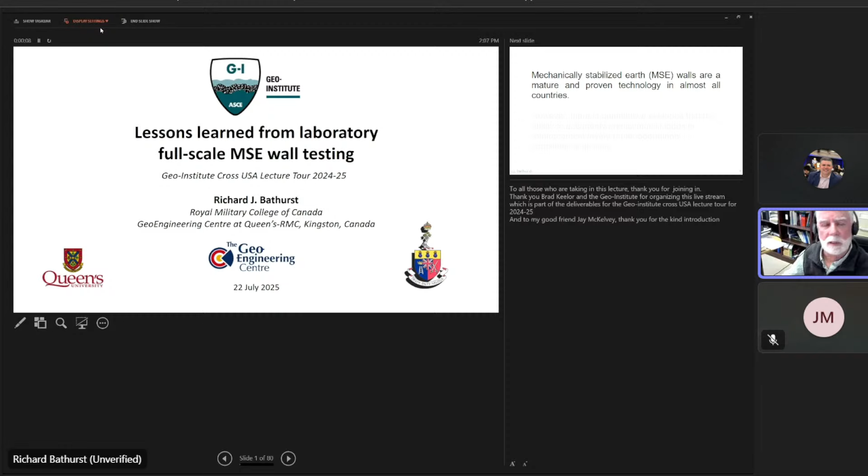I'm sharing my screen here, hopefully. We've got the whole screen, but here we go. It looks like something's coming. Just switching it over. So there we go. So if things are okay, then you should be seeing my first slide.

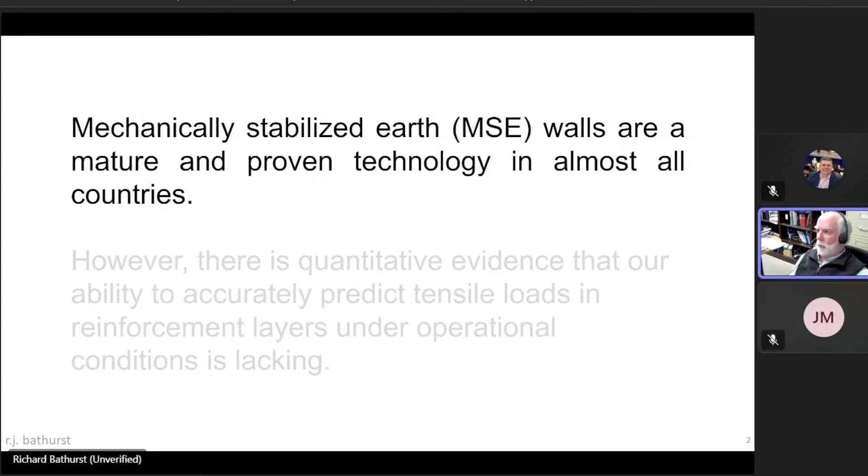For those who are new to the planet, here are some examples of MSE walls. This is a very famous wrap face wall that was constructed in the late 1980s. It was the highest wrap face wall of its type at that time. You can see in the cross section that this wall, like other MSE walls, is essentially a gravity structure in which horizontal layers of geosynthetic reinforcement are added to stiffen and strengthen the interior of this gravity mass. So this is a flexible wall face.

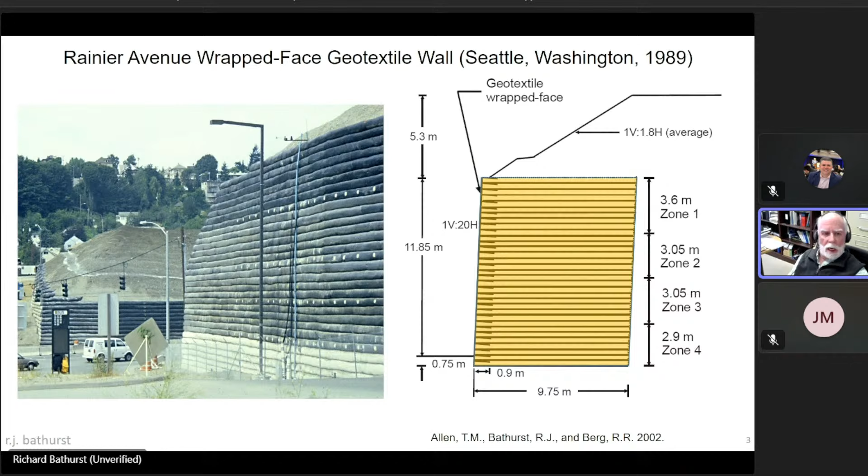But also hard-faced walls are constructed. This wall appears to the layperson as a tiered conventional concrete gravity wall, perhaps, or T-wall, but the fill behind the facing panels is reinforced with horizontal layers of a uniaxial geogrid in this example, which is affixed to the concrete panels.

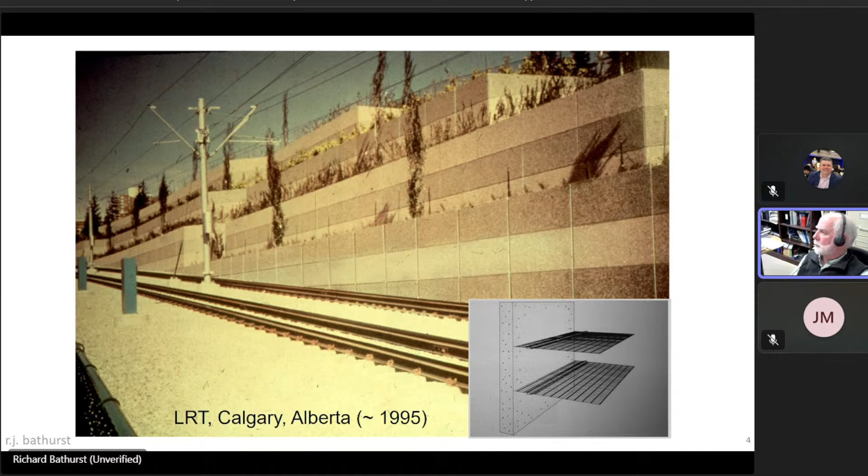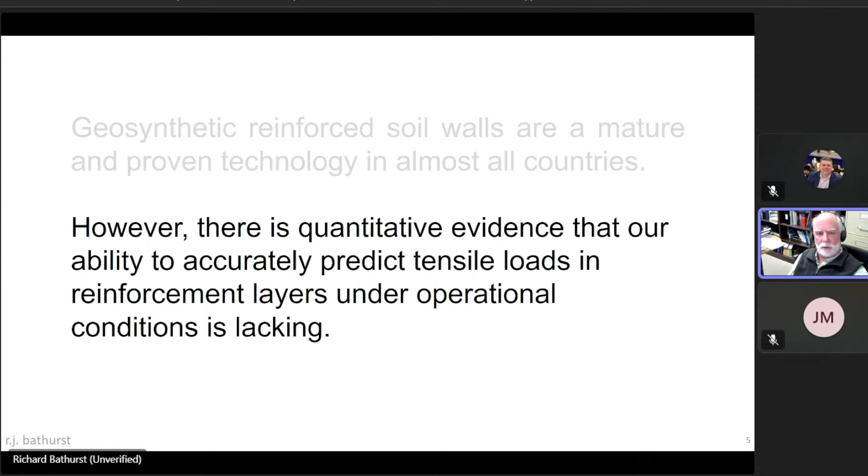So even though these structures are now ubiquitous on the earthworks landscape, at the time of the work I'm going to talk about, there was evidence that we couldn't accurately predict what the tensile loads in the reinforcement layers were under operational conditions. And of course, this was an impediment to the development of accurate and efficient design methods for the internal stability design of these systems. So how do we know this?

Well, myself and my co-conspirators collected measured loads from instrumented field walls, both steel reinforced type and geosynthetic reinforced type, although I'm going to speak mostly about geosynthetic walls in this presentation.

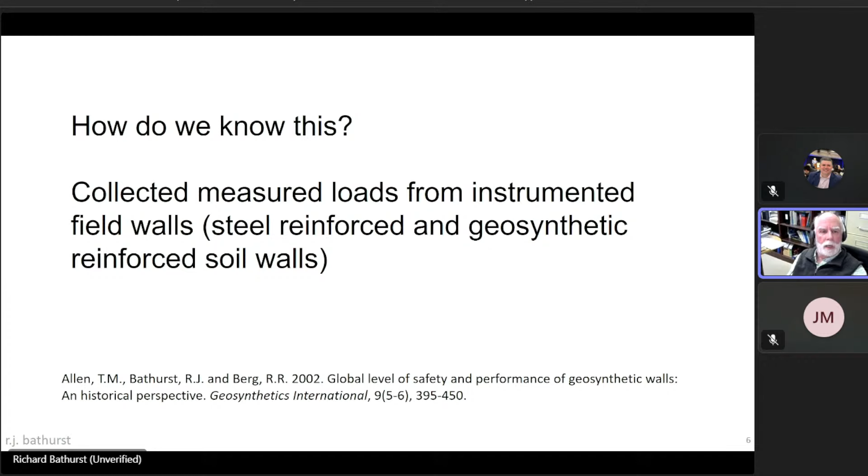Here is an example of a full-scale field wall. It was actually a test wall constructed near Chicago in the late... it was around 1990. Here you can see a modular block wall, and the right-hand side shows it during construction where a reinforcement layer is in place. You can see some extensometers, and you can see some slope inclinometer casings as well.

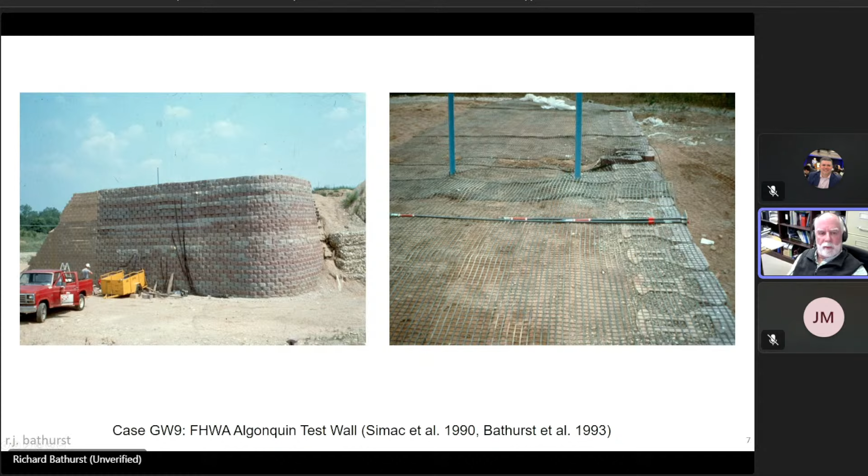So there were some quality measurements from full-scale walls available. Again, that very famous wrap face wall I spoke about earlier was also instrumented, and during construction and up until the end of construction and surcharging, the strains were recorded in selected reinforcement layers. From these strains, tensile loads in the reinforcement could be deduced.

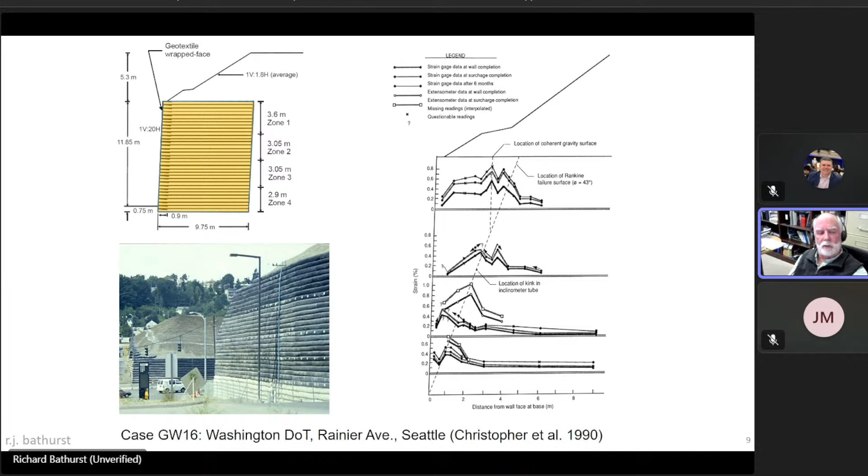From these full-scale walls, the accuracy of load reinforcement models could be tested. This was done by, for each instrumented layer in these walls, going to the existing design methods at that time and predicting what the maximum load in that reinforcement should be according to theory or the design methods. This is the simplified AASHTO method, if you like.

In fact, what we found was that on average, the measured tensile loads were about a third of those predicted using the current AASHTO simplified method. In addition, not only were the mean predictions of load hugely conservative, but the distribution of loads, as I will show later, was also poorly predicted by this simplified method.

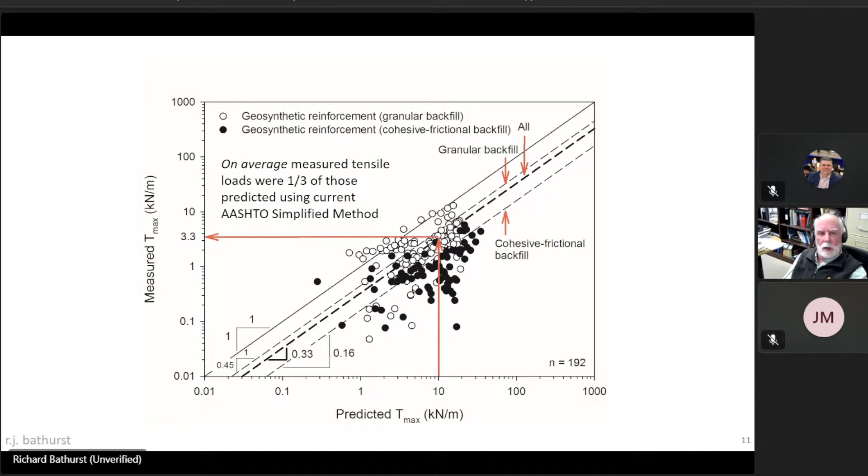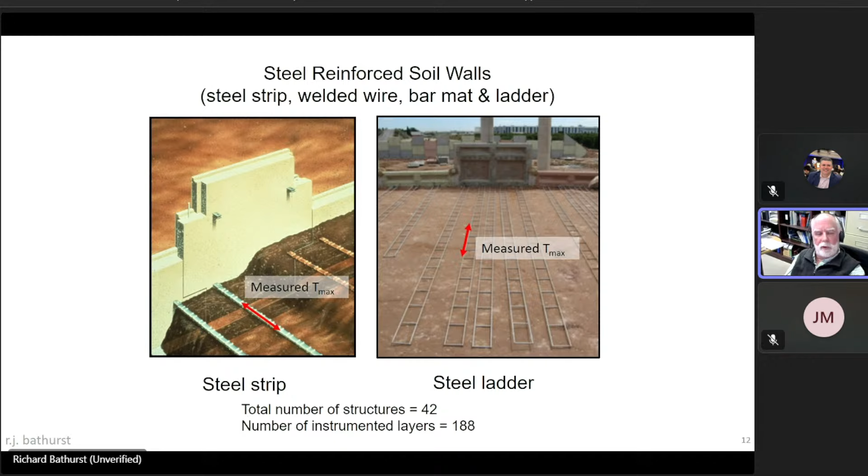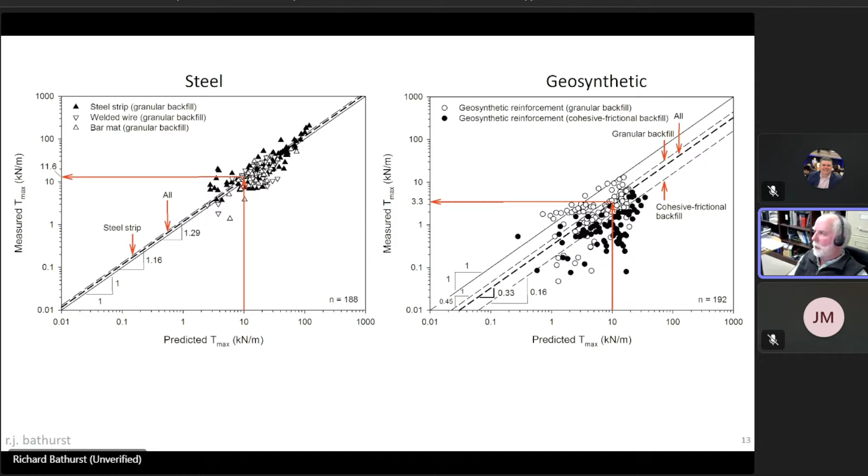So to better understand how these systems work, my colleagues and I decided we needed to carry out carefully controlled laboratory full-scale wall testing to complement the database of instrumented and monitored field tests. It's very difficult to get a field test instrumented and monitored for obvious reasons, and there's also the issue of control of the construction and instrumentation when you're trying to use a prototype field wall to make these measurements.

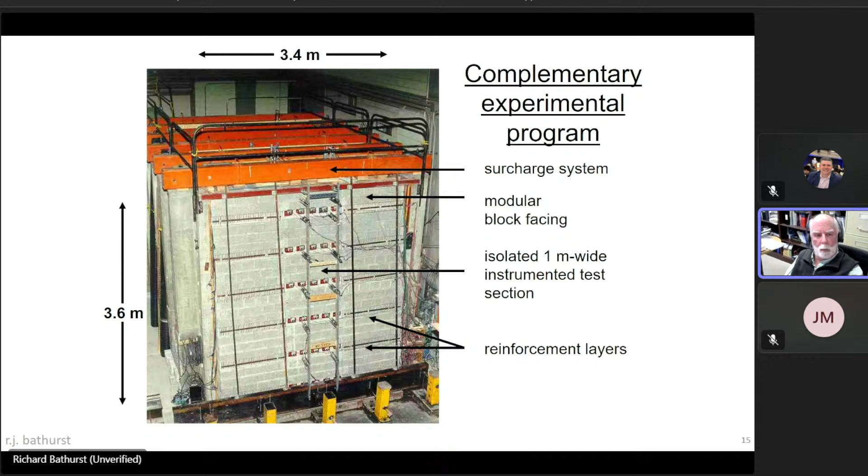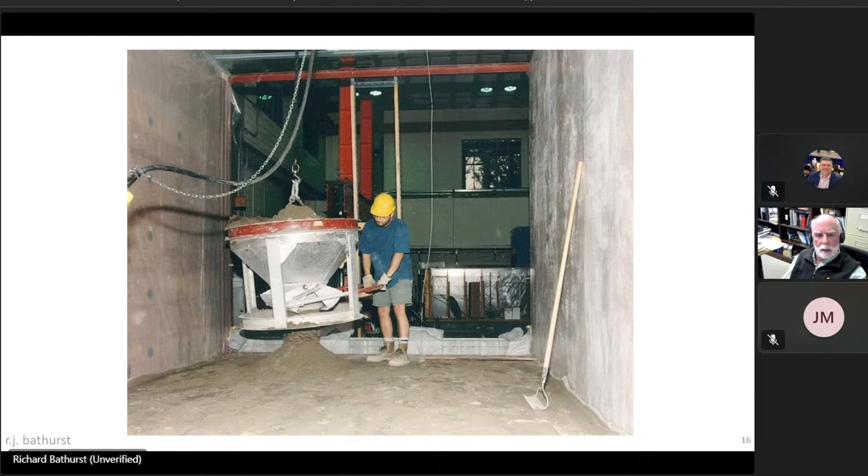In fact, there were over 300 pieces of instrumentation in a typical wall, and some of my friends used to tease me and tell me that I was testing an instrumentation reinforced soil wall.

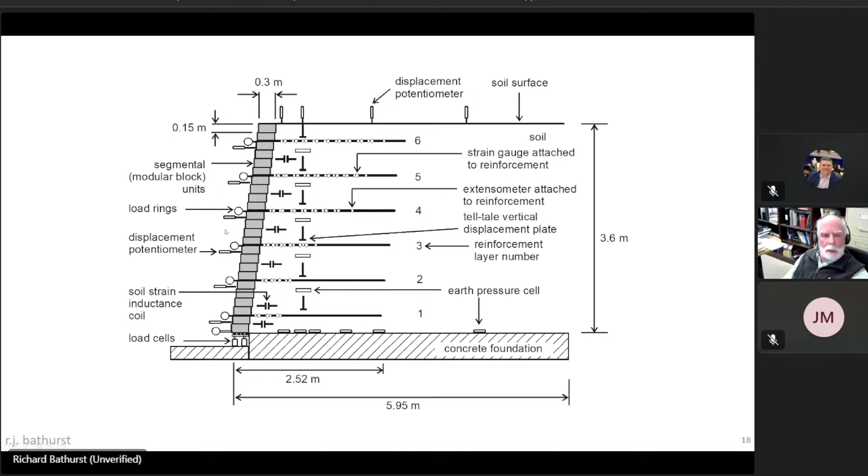So the idea was that we could then isolate the contribution of the effect of, for example, the facing type, the number of layers, or the polymer type. Here we see a cross section of the control wall, and the shaded area are the modular blocks. The facing was inclined at a batter of 8 degrees. Again, after the wall was constructed, it was surcharged in stages.

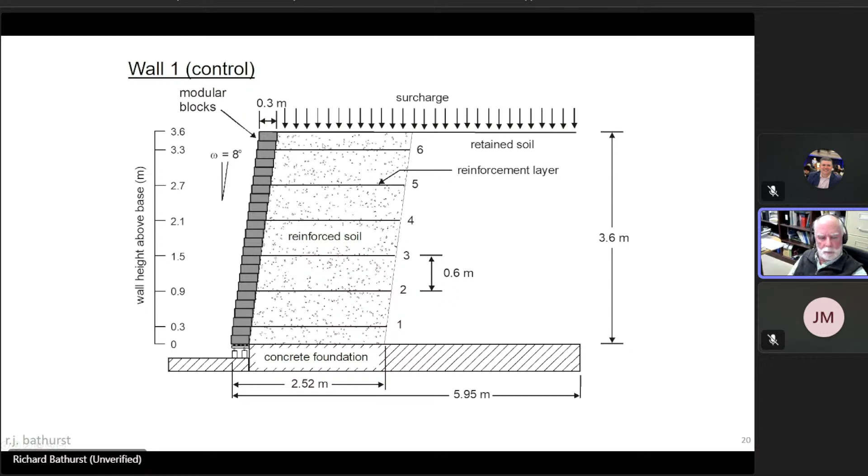Here is an example of one of the other walls. Again, it's a modular block facing, but now the facing batter has been increased from 8 degrees to 25 degrees. The idea is that the difference between wall 1 and wall 8 could be largely ascribed to the effect of the facing batter.

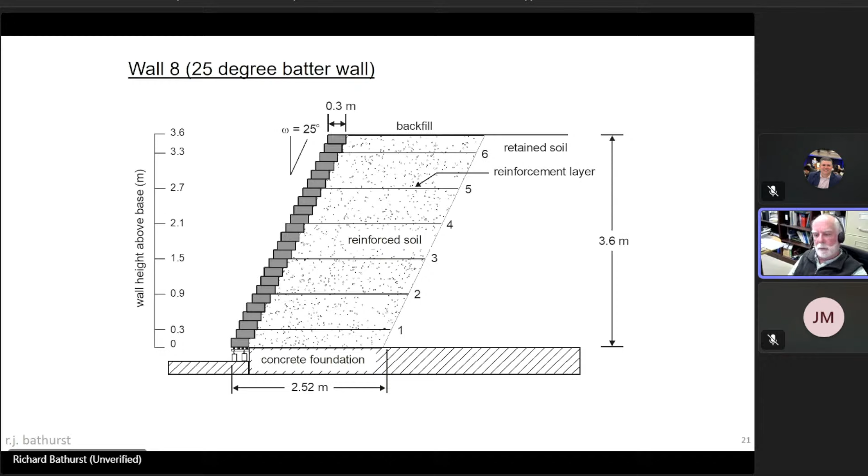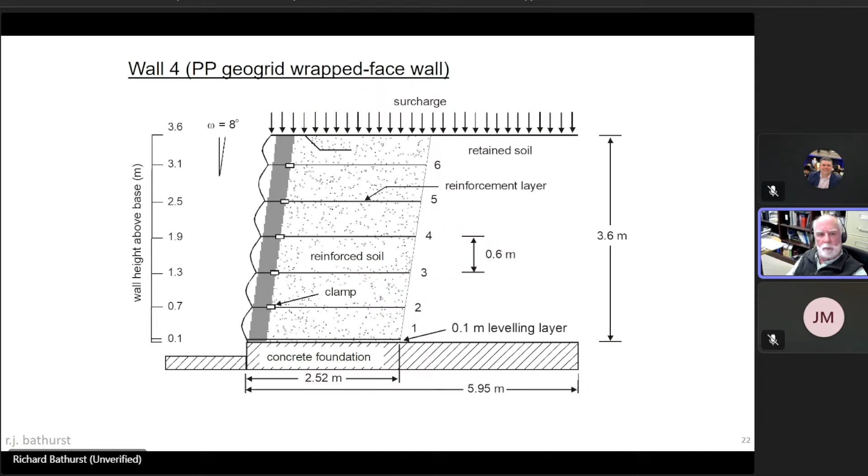I mentioned that we use different reinforcement types, including a polypropylene geogrid, a polyester biaxial grid, and we also used a welded wire mesh.

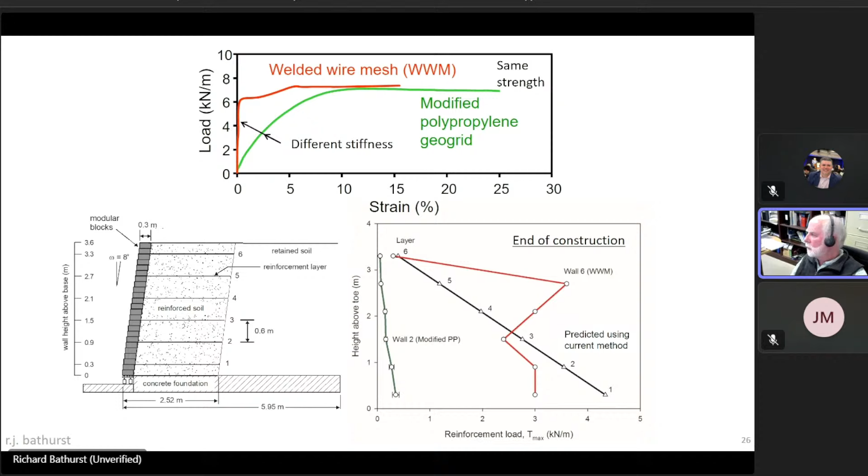So it's clear from the examples I've shown here, just from our lab testing, that it's reinforcement stiffness and not the strength of the reinforcement that is important. Both of those walls had the same strength, but they certainly didn't have the same stiffness.

Another observation we were able to make is that the soil and the reinforcement seldom simultaneously failed if you surcharge these walls heavily. This is in contrast to concepts of limit equilibrium, where reinforced systems are assumed to generate their limiting strength under the same conditions. This was not observed in our tests, and I can show that in the next slides.

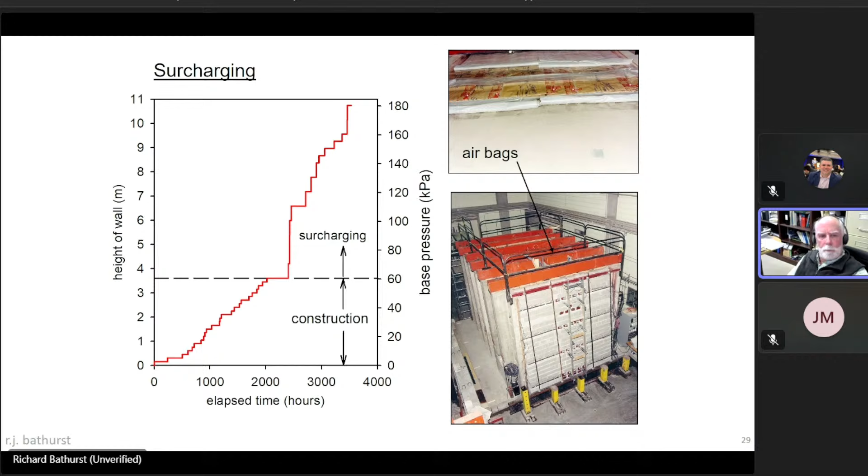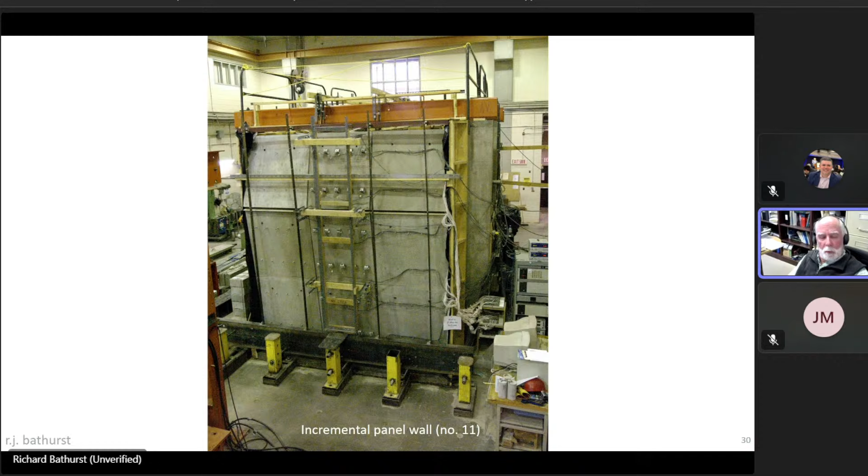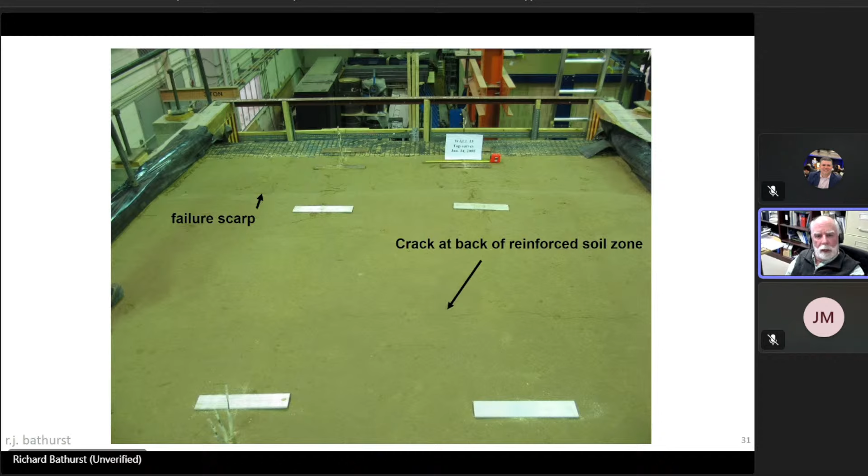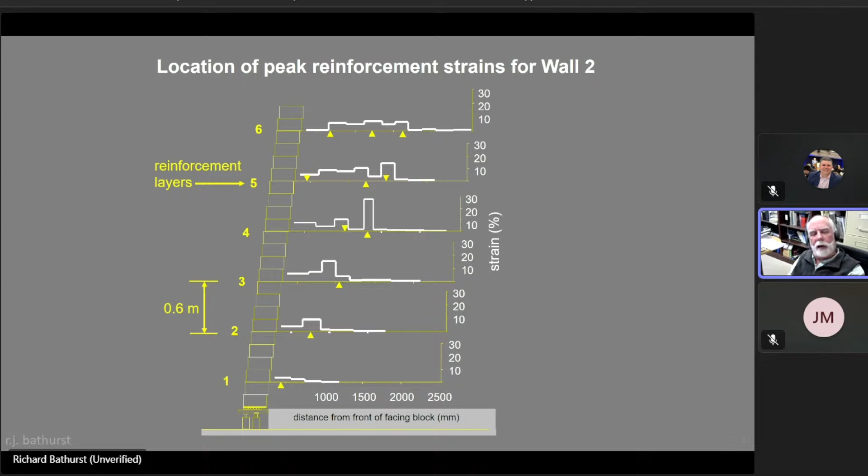At the point of incipient failure, we registered the strains in each reinforcement layer, shown in this histogram. Then we excavated the wall from the top down in very thin slices, just as if we were archaeologists, and that way we were able to follow the internal failure surface from the top of the backfill down to the bottom of the wall. The observed failure surface is in reasonable proximity to the peak strains we observed in the wall.

The failure surface is non-linear and perhaps best described by a log spiral surface, and is shallower than the predicted Coulomb or Rankine failure plane that we assume in some of these earlier design methods.

During excavation, we would come to a reinforcement layer and take a close look at it, comparing its geometry. The front of the wall is out at the left, and as you go along, you can see the internal failure surface occurred here, yet the reinforcement carries on. So the soil has failed, but the extensible polymeric reinforcement was able to continue straining past the point when the soil failed. That's what I meant by the soil and reinforcement not failing together.

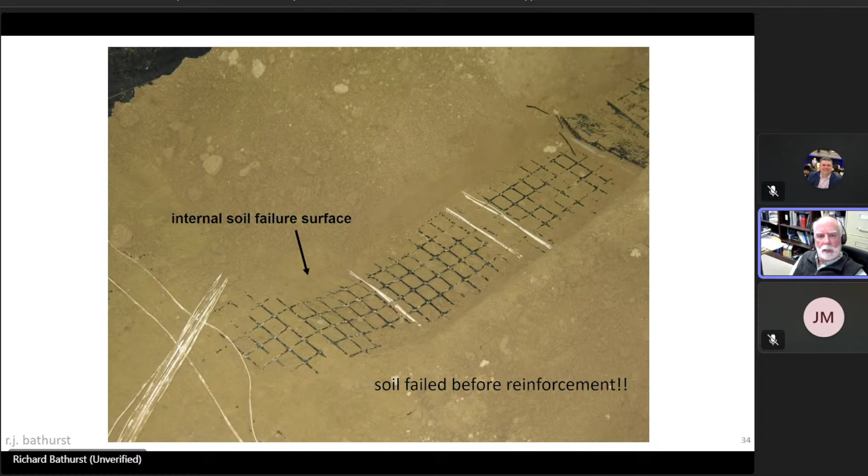Other evidence related to failure conditions was that in our database of instrumented field walls, we found there was no evidence of an internal soil failure surface if the maximum reinforcement strains were less than 3%. That was an important indicator of the partition between working stress conditions and limit equilibrium, or failure conditions.

So that meant keeping strains to less than 3% would mean no slumping, no continuous deformations in the wall, etc. In fact, most walls we've monitored in the field show reinforcement strains under operational conditions, the conditions the wall was designed to resist for its lifetime, almost always less than 1%.

If you do a tensile test on these extensible reinforcement products in the lab, they'll go out to 10 or 12% strain before they rupture. So this is another indication of the huge redundancy and conservativeness in the design of these walls.

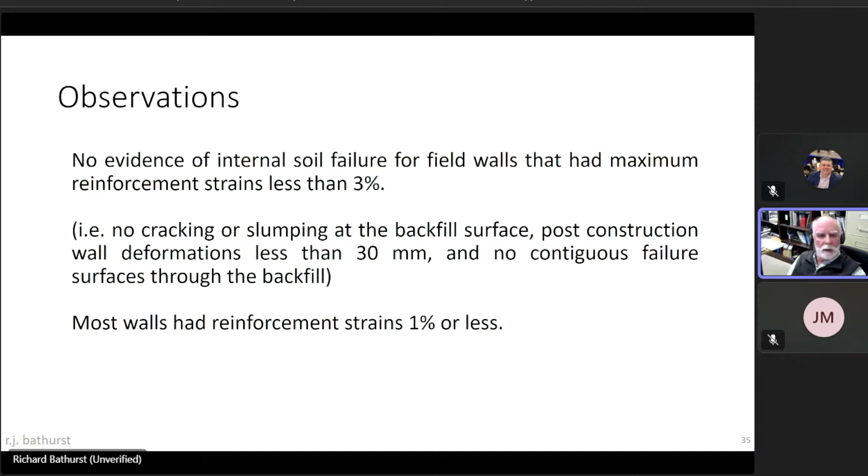Now, these full-scale walls I was describing take a fair bit of time and effort to build. Just for your entertainment, typically during the decade I was doing these tests, I would have a master's student responsible for organizing the construction, instrumentation, and monitoring of these walls. These were special master's students because they were all serving military officers, so they were perfectly fit for this research since they were trained to be organized and also not to talk back to their supervisor.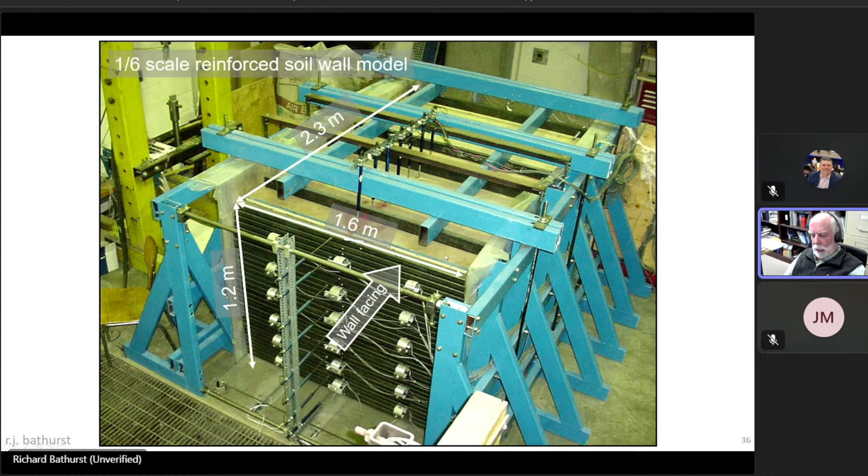However, it took a lot of time, so we carried out another parallel investigation in which we built similar models, but at 1/6 scale. Here you can see such a structure. The walls are only 1.2 meters in height, but had the same similar instrumentation with connection, load cells, airbag system, and lots of instrumentation. Here you see a cross section.

The advantage of these reduced scale tests was that we could build them at a higher rate of production. We could also test other things not convenient at full scale, including using rubber mats and foam pads to simulate more compliant foundations, and thereby see what influence these more compliant foundations, compared to a hard concrete base foundation, would have on the performance of the reinforced fill and its deformations.

Another advantage of these tests was that the box I showed you had transparent sides, so we were able to use DIC monitoring to track the deformations in the reinforced fill. At the end of surcharging this wall, you can see the development of what we call contiguous failure surfaces, right at the point where the wall failed. And gee golly, maybe it was just good luck, but you can see that the maximum strain is about 3%. Maybe that was fortuitous, but I'll take the win.

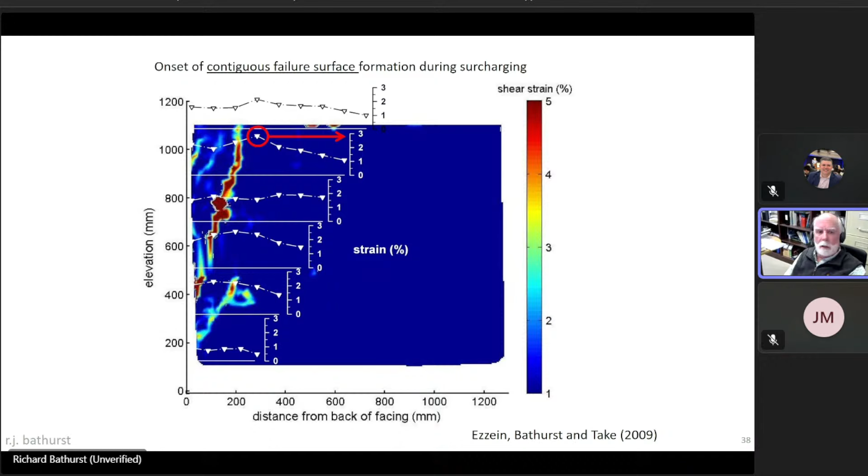Another observation is that we found the distribution of maximum loads in the reinforcement layers was typically not increasingly linear, or linear, with depth.

It was usually bilinear. We demonstrated this by taking all of the measured loads recorded in full-scale field walls and plotting them on this normalized plot, where the horizontal axis is the maximum load in a reinforcement layer divided by the maximum load from all instrumented layers, and the vertical axis is the normalized height of the wall.

The light gray symbols are the predicted values, assuming the current limit equilibrium method of calculating loads in reinforcement layers, and you can see they fall more or less linearly with depth. The measured results, shown as open circles and filled circles, are actual data. If you want to capture that data, you're better off with a bilinear distribution, not this linear distribution.

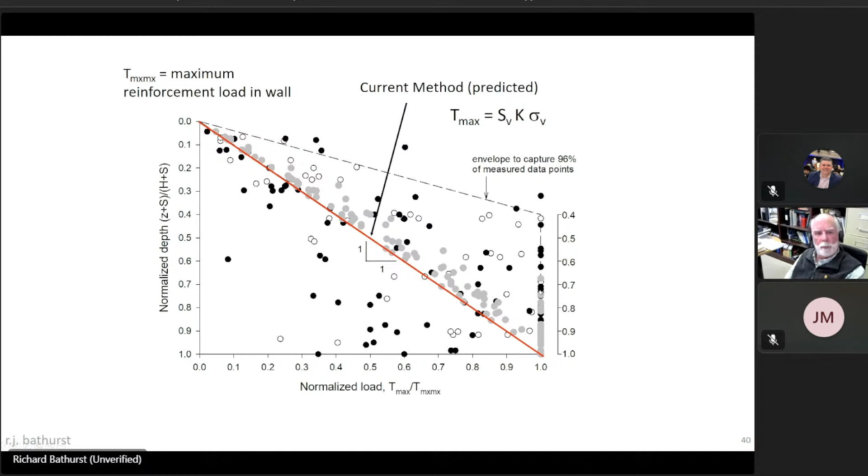Another important and practical observation was that we found that the maximum loads in the reinforcement are more likely to occur near the connections than at locations predicted by an assumed internal failure surface using simplified methods. I showed you that alignment between a Coulomb surface and the internal peak strains, but under operational conditions, this is not the case. It's most easily demonstrated by looking at the results from our wall tests.

Including this incremental concrete faced wall, this is a relatively rigid vertical structure, that is the facing. If we focus our attention on the connections or the strains in the vicinity of the connections, we get plots like this. Each one of these subplots is one of the layers in this lab wall, and the symbols are the actual measurements. If you focus on the symbols, you can see what I mean - they're generally the highest ones are close to the back of the wall.

As a sidebar, you can see a bunch of continuous curves here, and these are predictions based on different soil models. These physical results are seen to be in reasonable alignment with the predictions, which demonstrated that our numerical model was doing a reasonable job at predicting the performance of these actual physical walls.

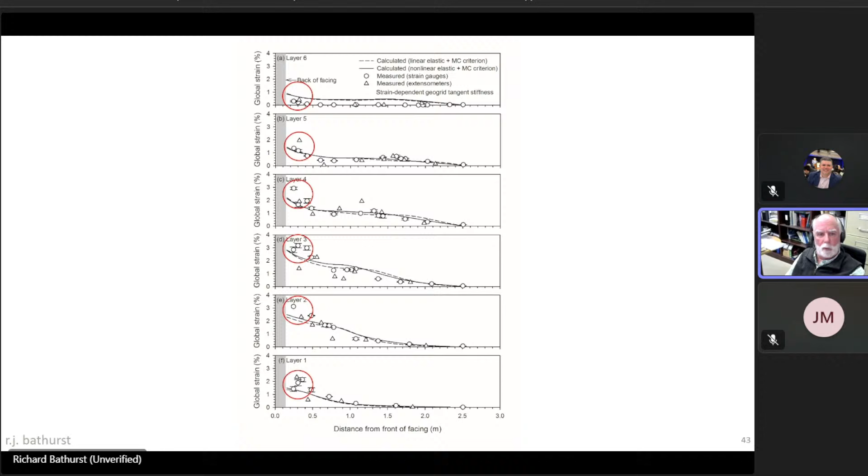So the question is, what is going on? Well, what is going on is that when this wall is being constructed, the soil is being placed and compacted, it moves downward relative to the facing, which is vertically rigid. There may be some additional vertical settlement of the fill as the wall moves out slightly. And what that does is it puts what I like to call parasitic loads on the connections, which are not predictable using force-based limit equilibrium methods of analysis.

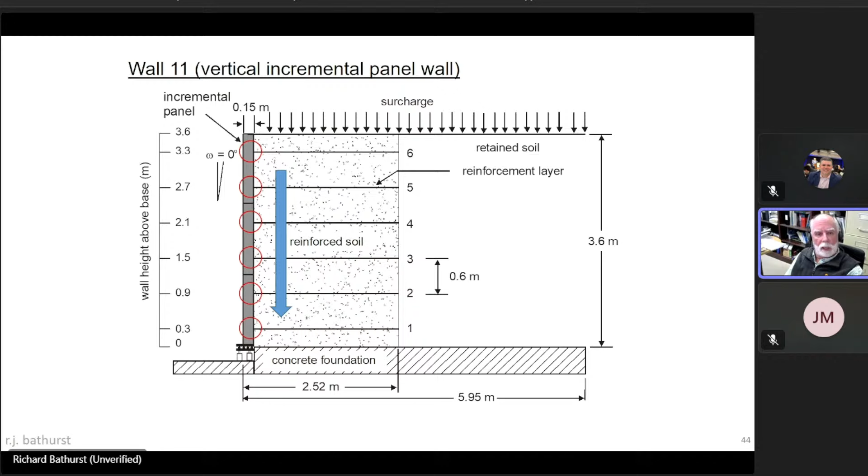And so we saw this in our physical models under carefully controlled conditions, and we also saw this in full-scale field walls. This is what we call the SR18 wall, and you can see the cross section here. These are production walls built near Seattle in Washington State. They were instrumented, as you can see in the cross section - you can see the technician attaching extensometers, etc.

If we look at this layer 4 at the top, you can see, yes, the strains are greatest behind the facing, because again, the soil is settling with respect to this relatively rigid facing system.

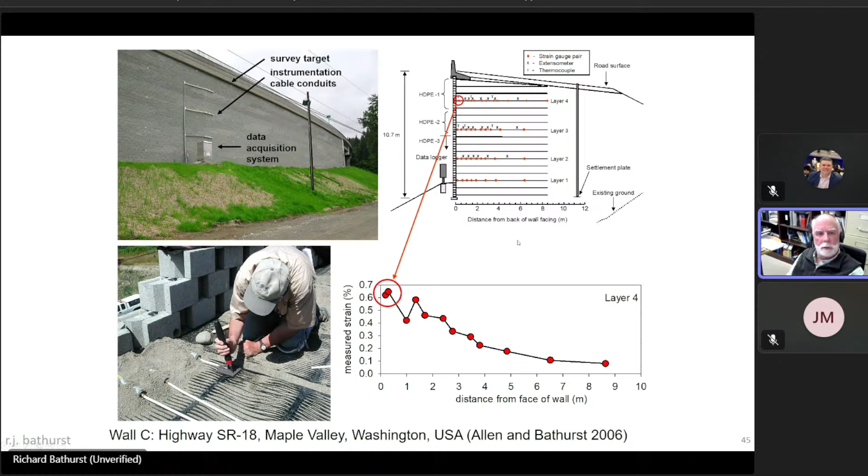Other important practical observations is that the reinforcement creep is very low. The creep rate is very low, and the expectation that the reinforcement will creep to rupture during the lifetime of the structure is just not supported by observation. In our tests, the walls were only left for short periods of time.

We saw that the creep strains were not increasing with time, but a better example, again, was that SR18 wall that I just showed you, where we were able to monitor this wall for 2.5 years almost after it was constructed. When you plot the strains in the reinforcement with the log of time, there's no way that these strains will increase dramatically under typical design lifetimes. So creep to rupture is not a problem for these structures, if they're built, constructed, and designed correctly.

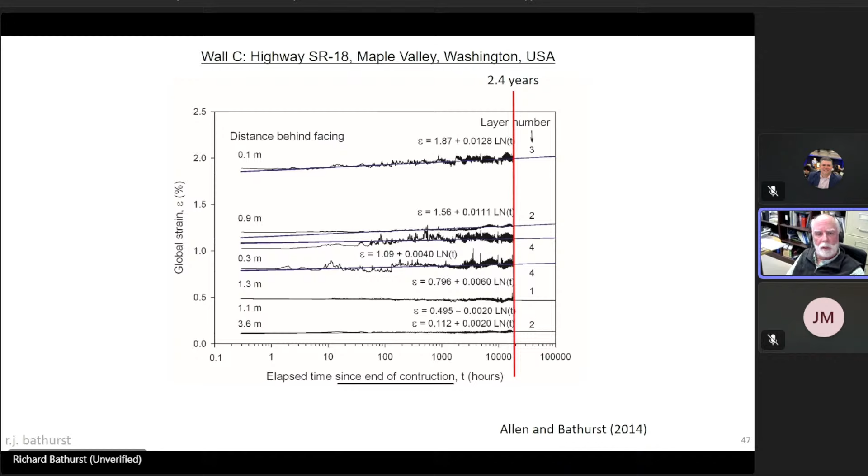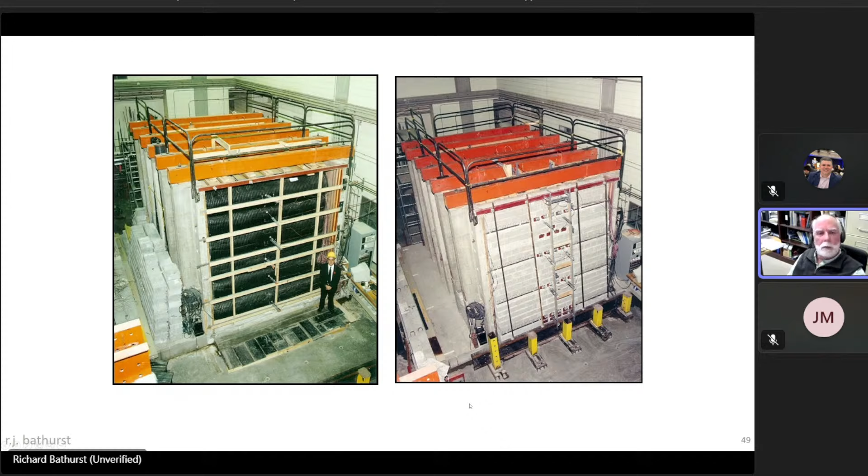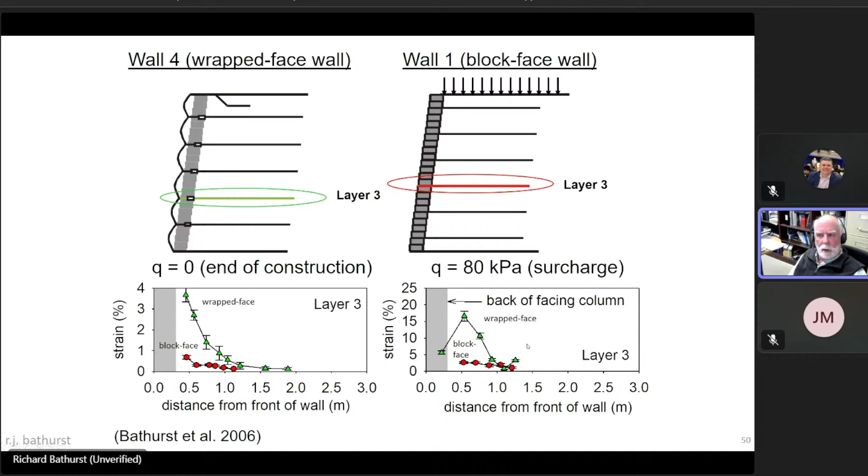In Japan, if you are the owner or you're selling or distributing a reinforced wall proprietary system, you have to prove to the government that these walls will work. They make you build truly full-scale walls, 6 meters high, instrument them, and test them. Only then do you get a certificate of approval that you can sell these things. Over a period of 20 years, this data has accumulated, and it was given to Dr. Miyata and myself to increase the database of wall performance. This data proved really quite useful.

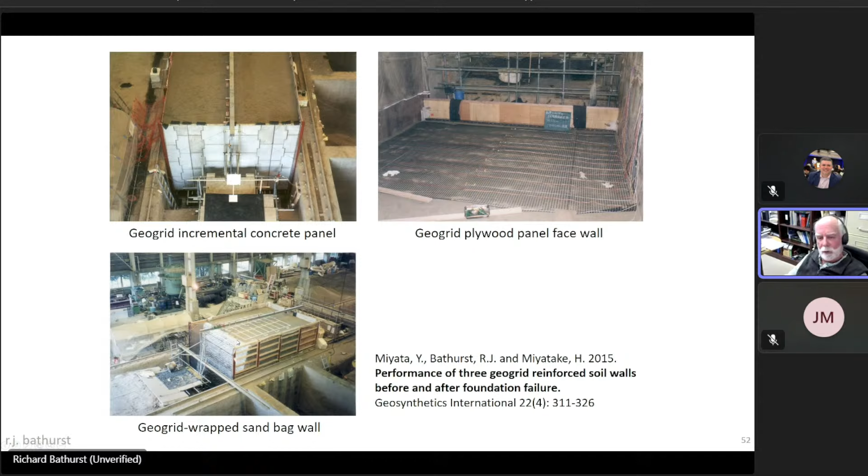Here you can see some slides of some of these walls that they built. Here's an incremental concrete panel wall, top left. Here's a wall with a plywood panel face, because they too recognize that the stiffness and flexibility of the facing will affect the loads and the reinforcement. And here's another one where they simply used sandbags as the facing. Dr. Miyata and I got a lot of mileage out of those walls.

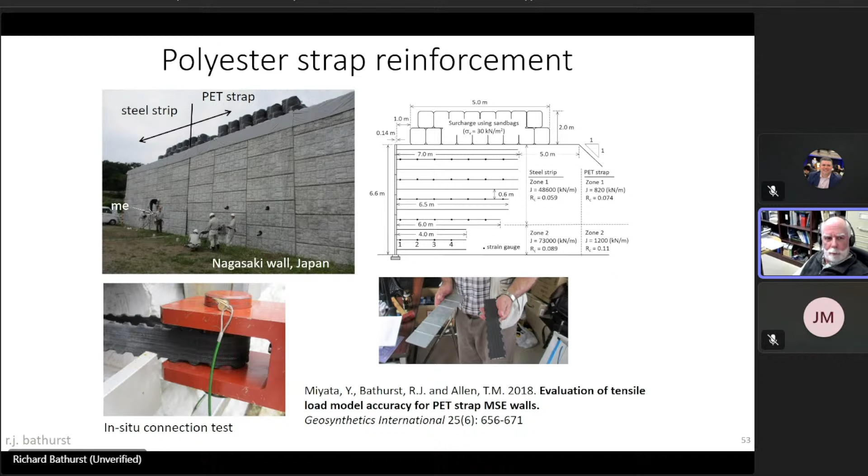So after spending a day on site here, Yoshi and I would get in our best kimonos and go to a fancy restaurant near the site and quench our thirst.

The practical consequences of these test programs were that reinforcement loads under operational conditions are much less than loads predicted using current limit equilibrium-based methods. There's an excessive amount of reinforcement, 2 to 3 times. The reinforcement is not located in an optimum direction. And, something I can't touch on here fully, because the loads are so high, it's impossible to calibrate reliability-based LRFD design limit states.

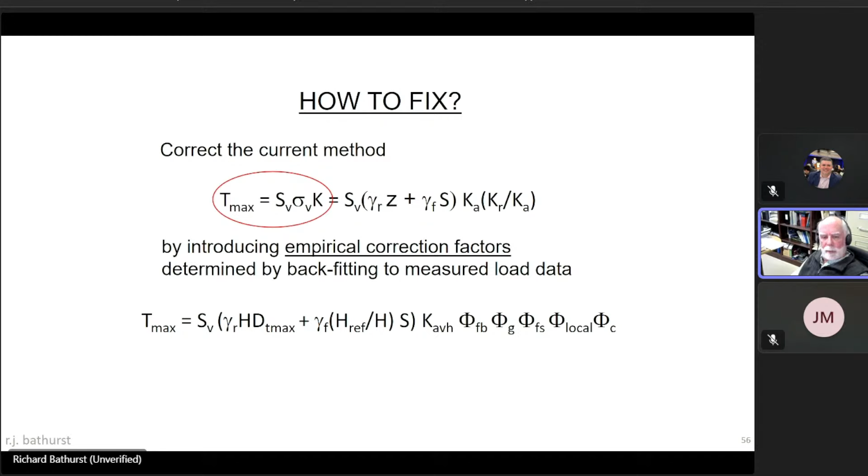Now, this is a pretty scary looking equation, but in practice, for most walls, some of these terms disappear—at least their value becomes 1 or 0—and the equation becomes much simpler and arguably not much more complicated than the current, now past AASHTO, simplified method.

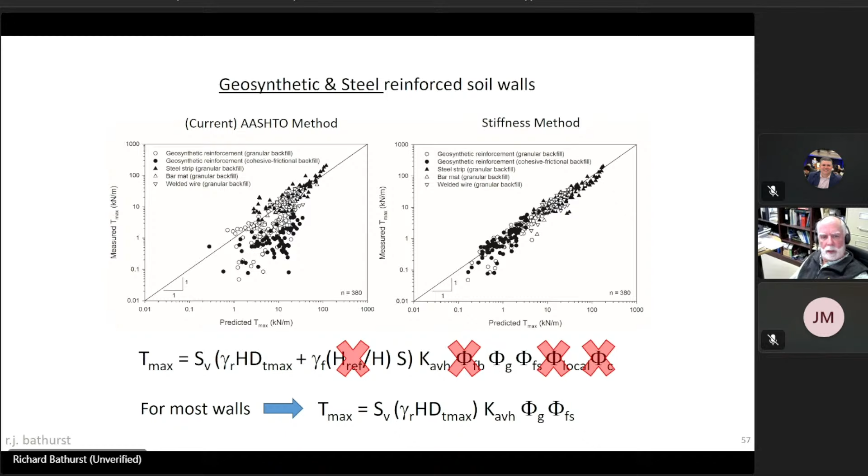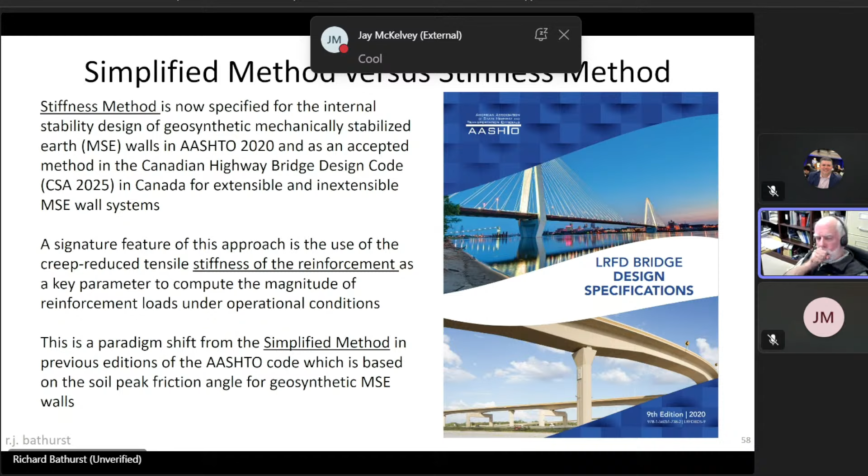In fact, this stiffness method is now specified for internal stability design of geosynthetic mechanically stabilized earth walls in AASHTO 2020. And it's an accepted method in the equivalent Canadian Highway Bridge Design Code, although in the Canadian code we use it for both extensible and inextensible reinforcement. Again, the signature feature of this approach is that it uses the stiffness of the reinforcement as a key parameter to calculate loads under operational conditions. This is a paradigm shift from the simplified method, which was based on the soil strength, not its stiffness.

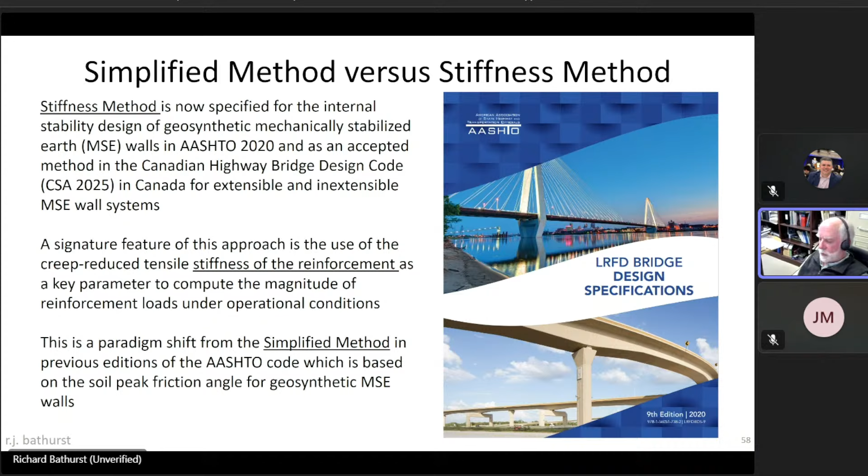Another bonus, and I'll say a few words about this: if you're in the business of numerical modeling—my last webinar focused on numerical modeling—these full-scale, carefully instrumented and monitored MSE wall structures at RMC are perfect to test against numerical models, perhaps using FLAC or finite element methods. This allows you to test the veracity of your numerical code.

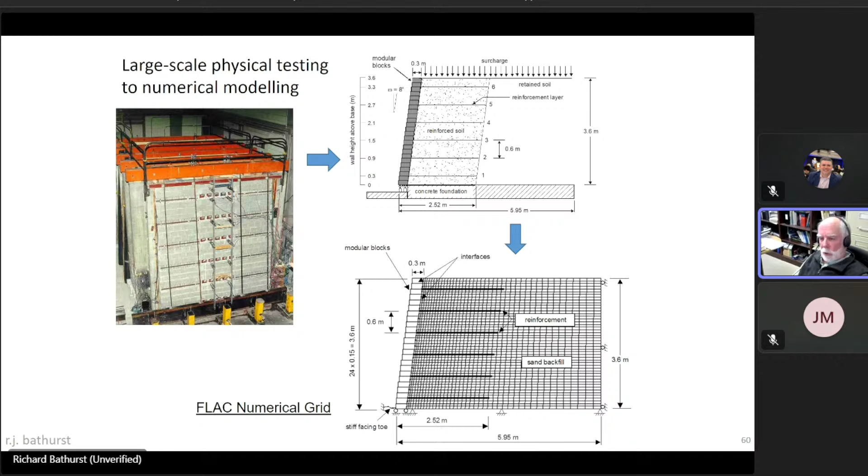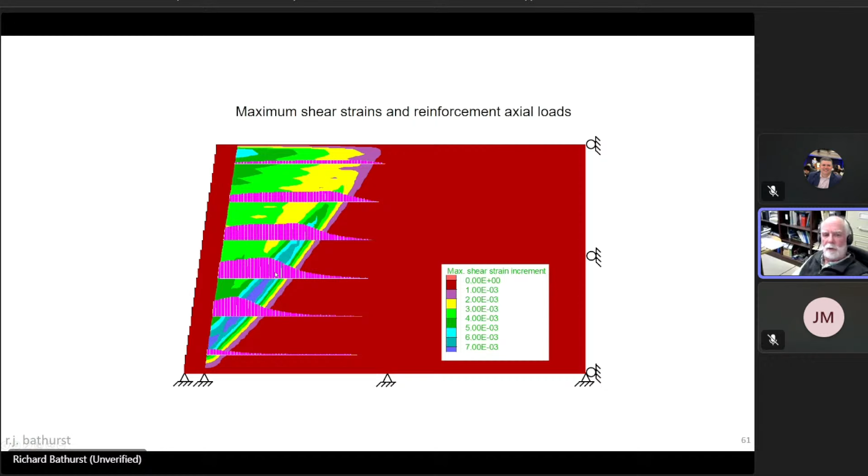Here's a pretty picture which has been developed from one of our simulations. It allows you to see the distribution of strains, the magnitude of the strains, and the like.

So that was a demonstration of the veracity of our models using the results of just one wall model in our suite of tests.

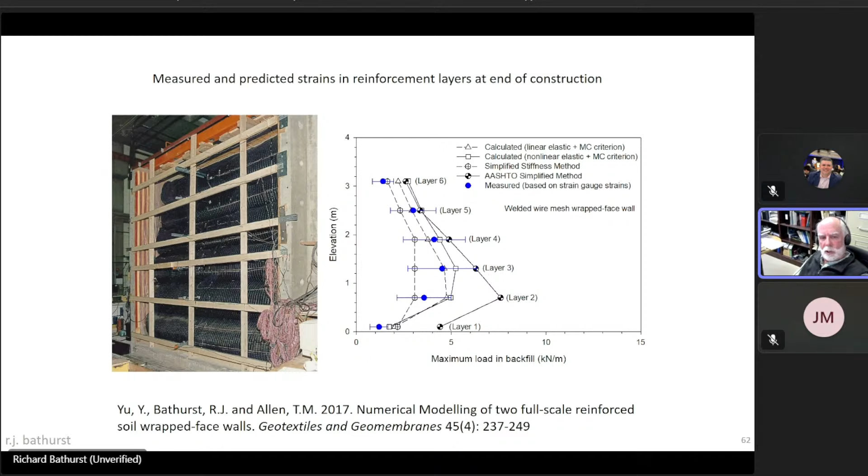I'm going to stop there, but I'll finish by giving a shout out first to my long-term friend and collaborator, Tony Allen. He was until recently the state geotechnical engineer in Washington State, and until recently chair of the technical committee on foundations and walls in ASCE. He's the guy that put me onto this problem.

He said, Richard, we need a new design method—what can we do? And I said, well, I have this test facility. He helped arrange funding through a pooled fund of something like 12 DOTs in the States, and I was able to scrape up money from Canadian sources and various companies. That's how this work was financed.

If you're interested in this work, you can just go to my webpage—it's easy to find, you can just Google me and find these papers. If you can't get the papers, I'm more than happy to send them to you. That concludes my talk. I thank you all for your attention.

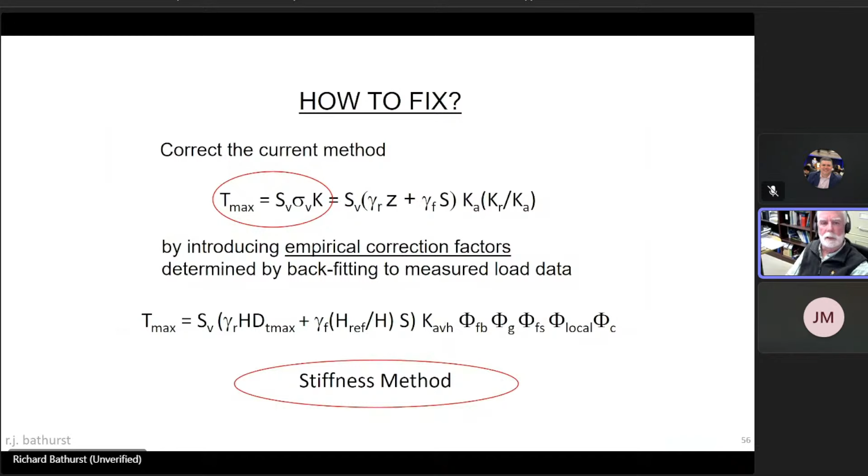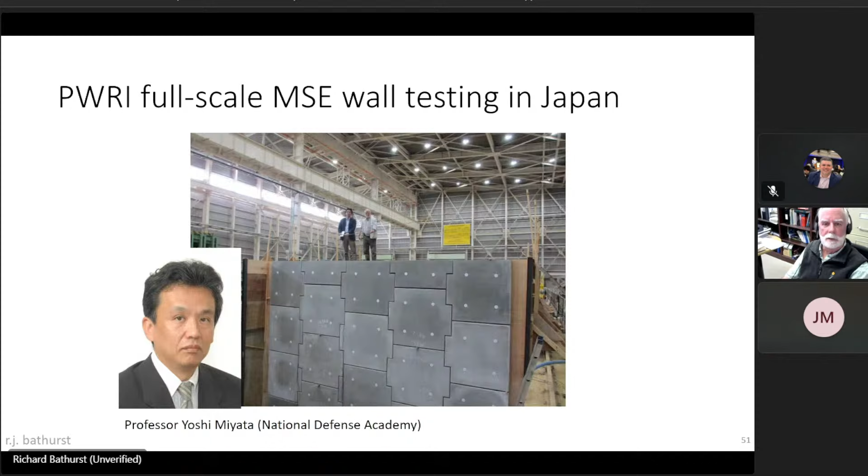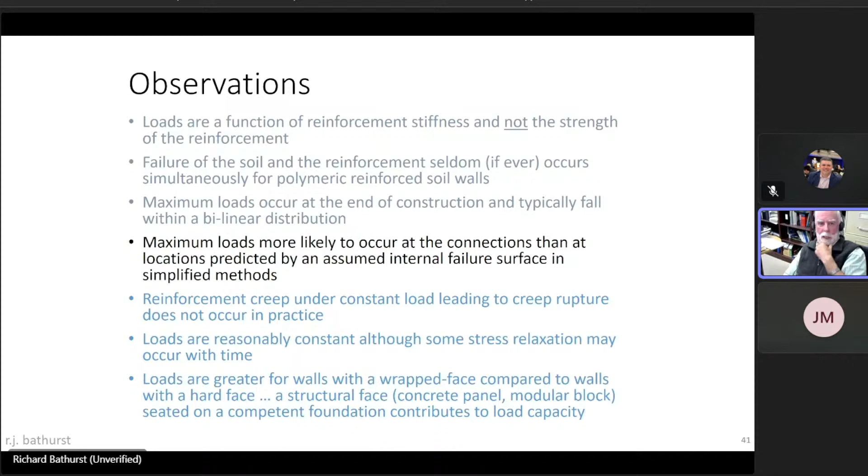It's best realized if I go back to an earlier slide. We're flipping back, let's be patient. Oops, I don't want to see that too often. I'm sorry, I should probably just... I'm just trying to slow you down, Jay. Okay, here we are.

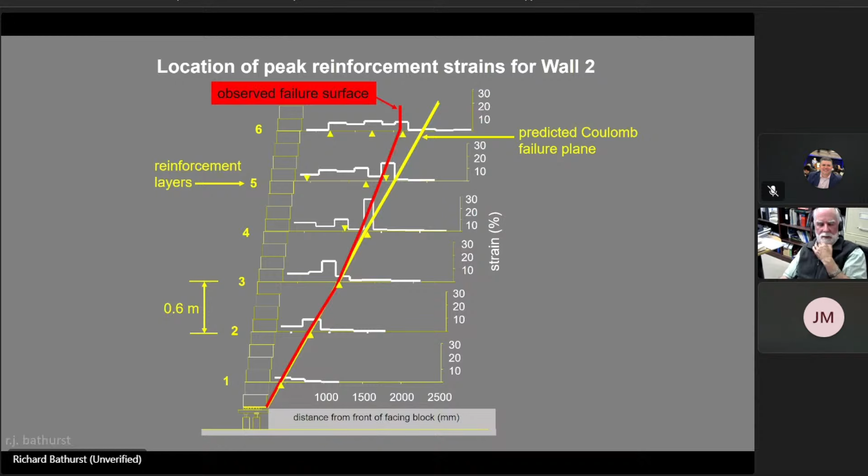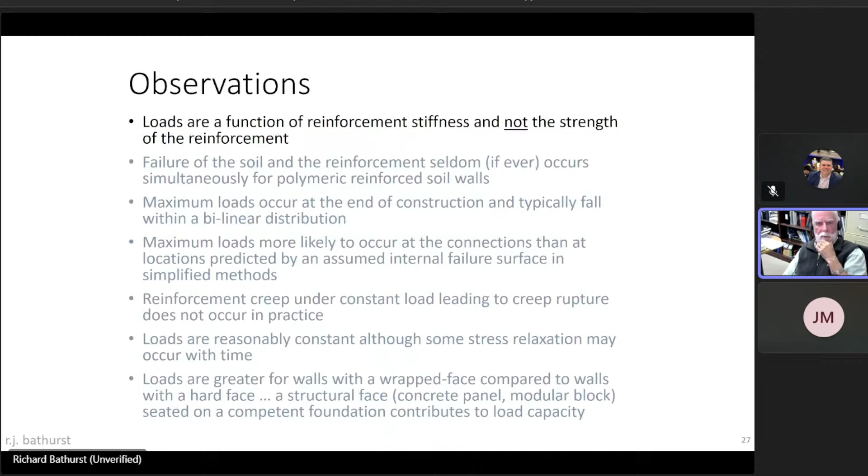Very nice, okay, so operational conditions—so that's not considering any reduction factors for, let's say, installation damage, durability, or creep, correct?

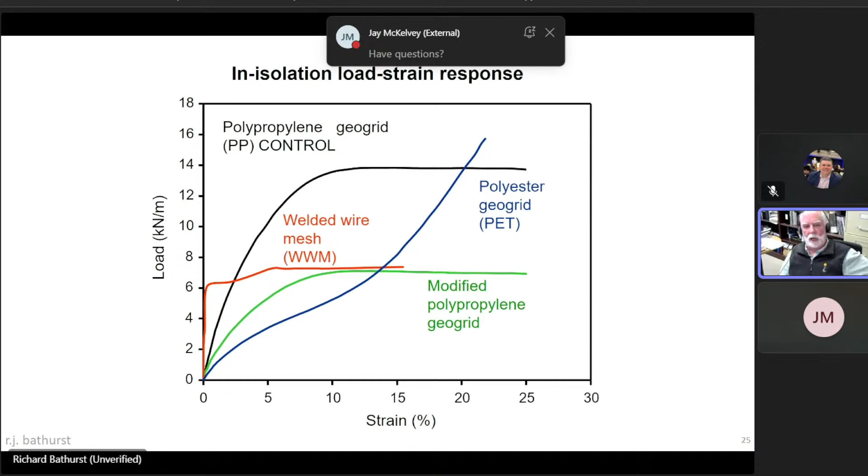No, in design we use a strength which is lower than the ultimate strength by dividing in those factors you just talked about. But the basic calculation is based on a reduction of the ultimate strength, which bears no resemblance to the stiffness of the material under operational conditions.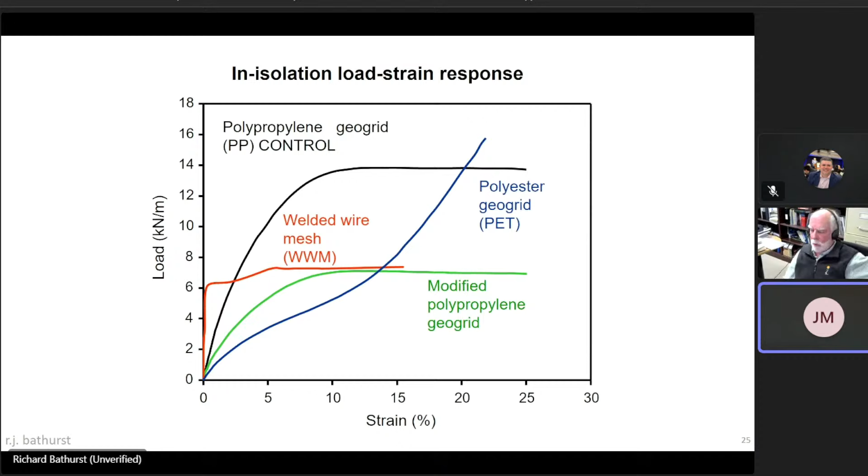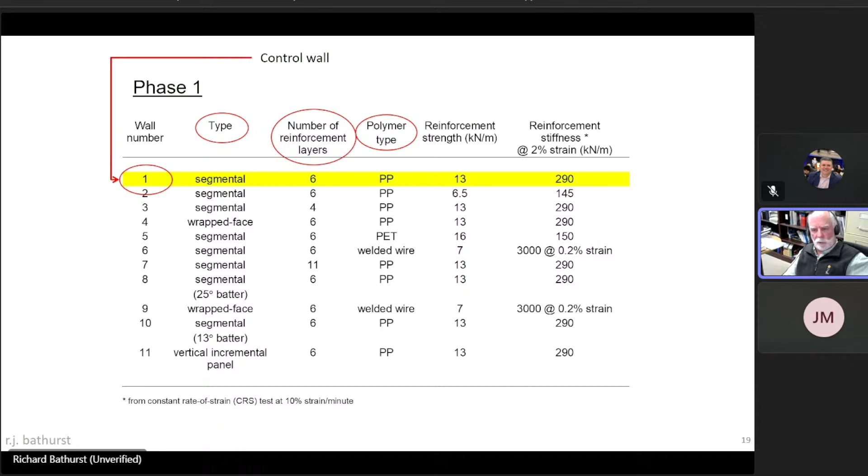What happened with that wall was that after it was constructed, they purposely wanted to overload the reinforcement so they could see what was, if you like, the true margin of safety.

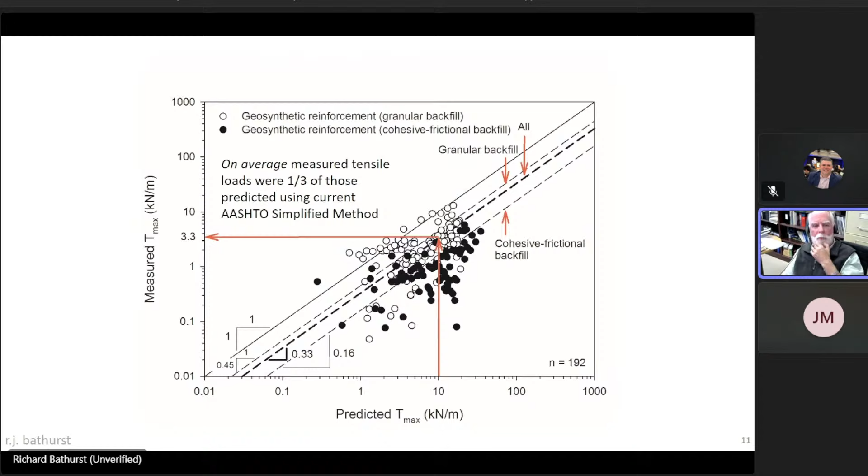By putting a surcharge on top of this wall after end of construction, supposedly the wall would fail according to the design methods of that time. And the wall said, no problem. So this was, again, proof positive that there was a huge amount of redundancy and extra capacity in these walls.